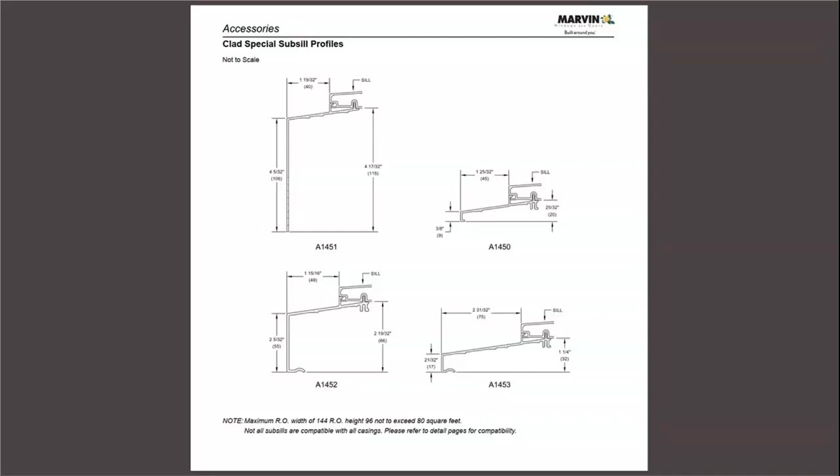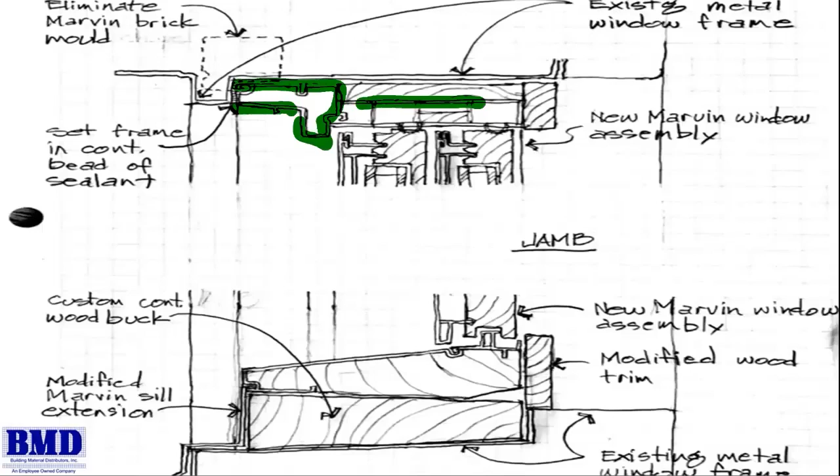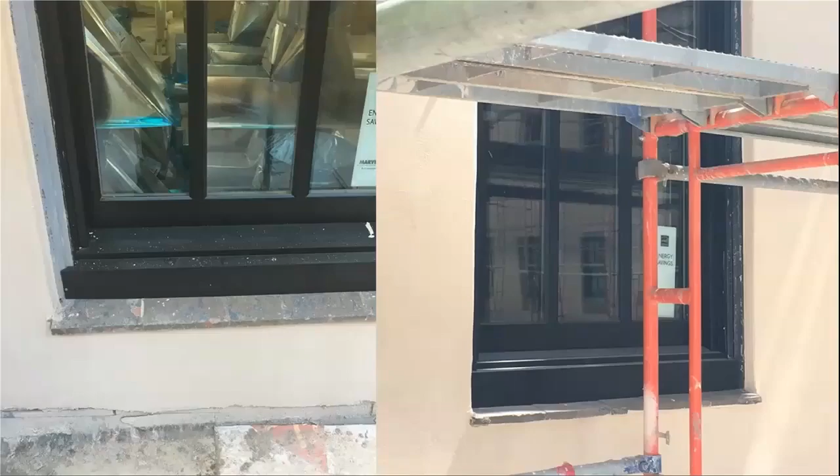And then just continuing with the process, here's that subsill, but in ebony. Do you remember when I showed you that detail when we slid over that subsill, trying to find what would work, and I showed you how it was a funky detail? I'll put an arrow here. So it was really tricky, in my opinion.

The installer did a great job. He took the profile of the original steel casing that you see there and created a jig. He cut the ends of the subsill profile and notched them on both sides so that when it was put in place, it fit as if it was meant to be there from the beginning. So what you see over here on the right, again, this is still mid-construction, but it's essentially the finished product, obviously still needs to be cleaned up with some construction overspray.

You can see how everything tied in and fit perfectly. You can't really see it here, but there's intermittent caulking, there's a gap. So in the event there ever was water infiltration, water would find its way down, take the least path of resistance, and weep out on the original terracotta. So you have a plan for water management long term.

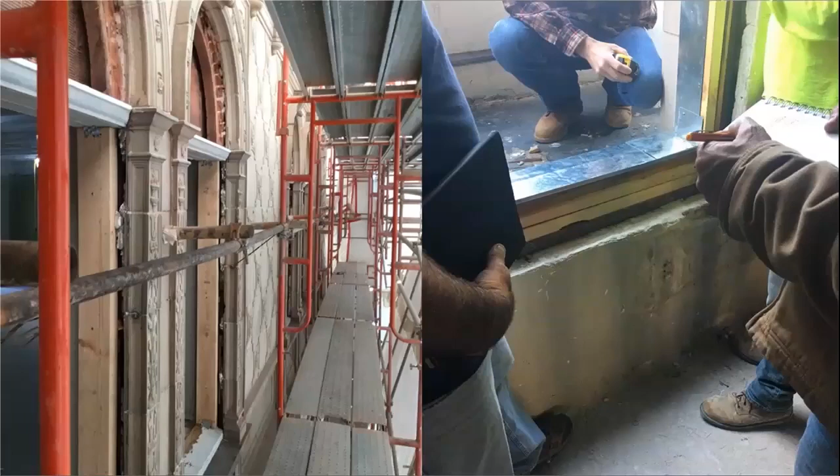So here's us on that top floor that I circled out on the scaffolding. You can see here are those round tops, and here were the original double hung windows. So when removed, you have these big, deep cavities in here. So what we propose is to put a buck system, a wood buck system, in there.

But what we also found is when we removed those arch tops, there's this faux wall behind there. So if you're standing on the inside, and we'll draw Mike Anderson there. There we go. If Mike Anderson was on the inside looking out, you can't see. So how do we contend with all this? And then how do we deal with these cavities when we put in the buck?

And then how do we tie it into the original stonework? And how do we make it waterproof? And how do we make sure we don't screw it up?

So what we see on the right here is us just in that process, coming up with the plan. I don't want anybody to look at this rigid pan and say, wow, that's a horrible rigid pan. Yes, it is, but that's not what we'd advocate during actual install. This was purely for mock-up purposes—us coming up with the idea of putting a rigid pan in there for long-term water management. We always say a rigid pan is cheap insurance, as it does a great job managing water.

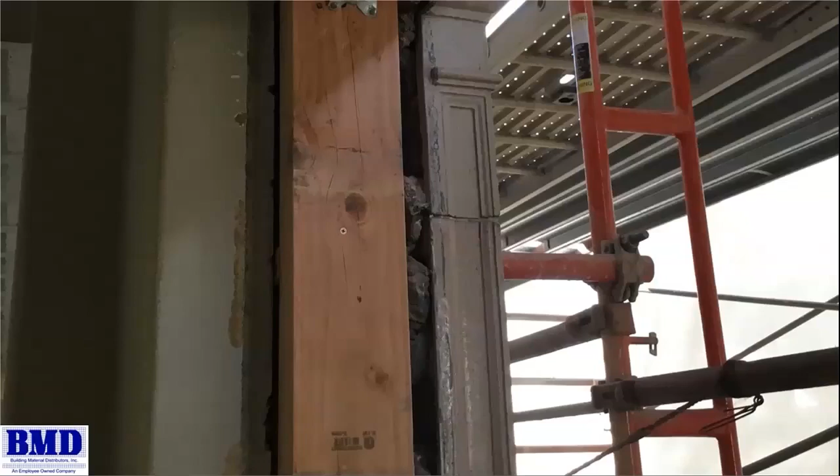Let's go a little further. Here's a close-up. We got our buck system in here that filled in this deep cavity behind here. But again, how do we contend with all this?

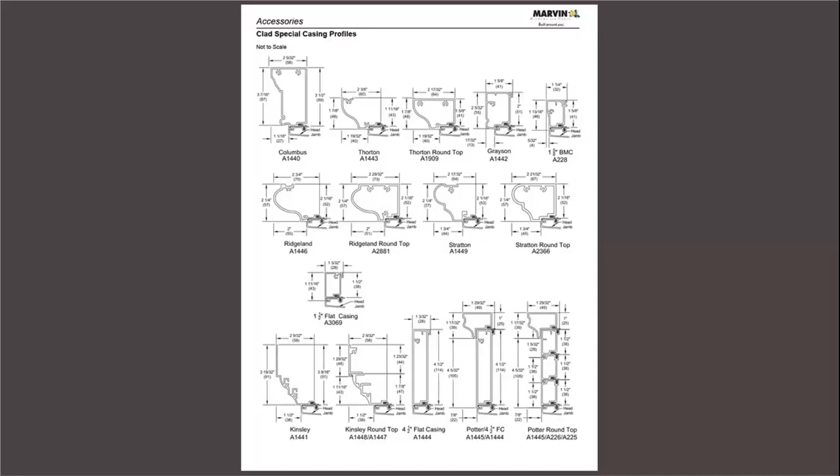Luckily, Marvin has a wide variety of extruded aluminum casing profiles. This isn't all of them, just some of them. But what we ended up selecting, I believe, was the Grayson casing because it closely resembled the original wood casing on this building. And this is what the San Diego Historic Board approved.

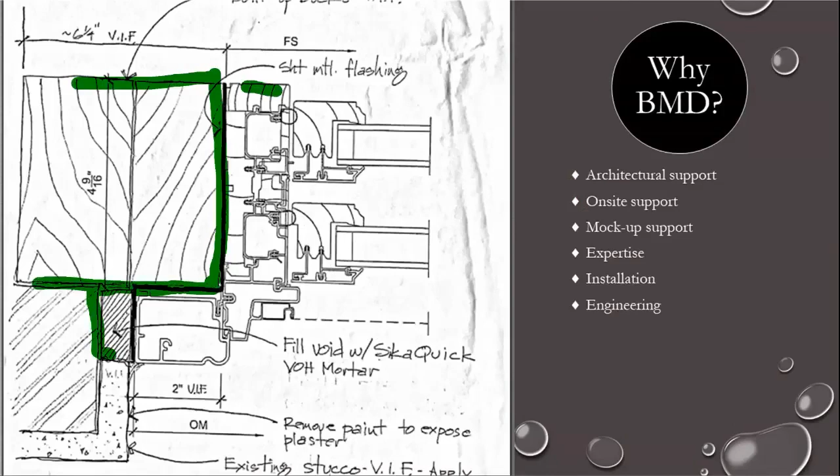Here's the wood buck, and here's the window. But then there was this void, so we proposed to fill it with SikaQuick mortar. And you can see how our casing here, which comes applied to the window, ties all together. So let's look at that in real life.

So quite a lot of collaboration, technical support, and consulting to bring all this together, and this is what they were looking for. Other manufacturers were brought to the table, but it was BMD as the Marvin manufacturer rep collaborating with our great dealer network and our tech department to really drive the solution on this project.

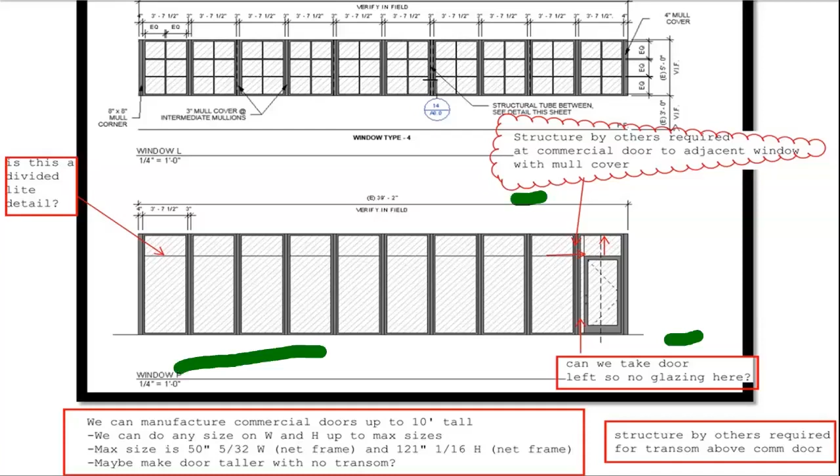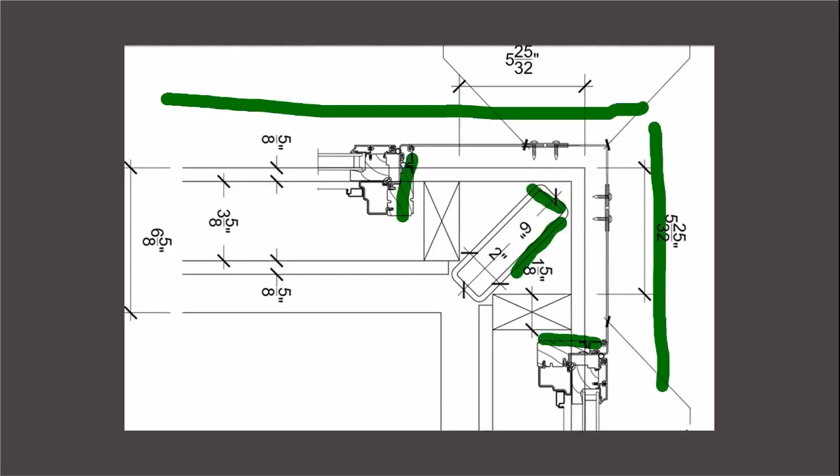So all these red lines represent the collaboration of us going back and forth with the architect to come up with the design. Here's a snapshot of one shop drawing we created for very large Marvin narrow frame awning windows, large mull assemblies, connected in a 90-degree fashion. This drawing shows where the steel structure was going to be, here's our windows, and this represents all the aluminum extrusions Marvin has and how we tied that together. Just one snapshot of the collaboration that supported this project.

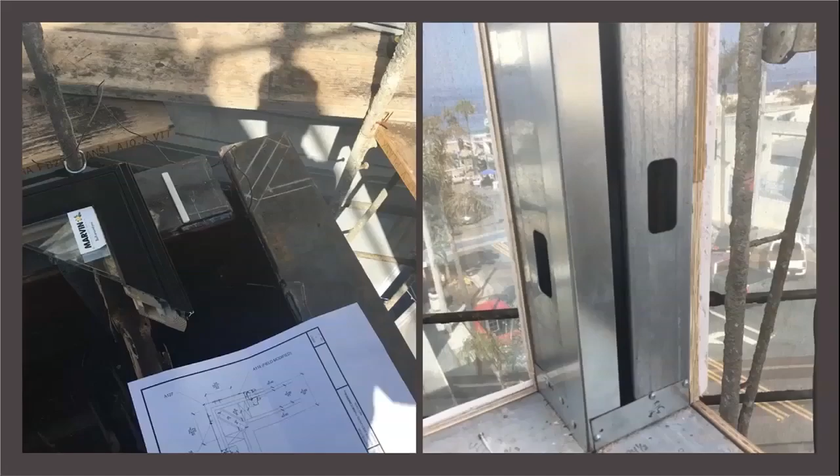Here's that shop drawing I printed out in my printer, on the left. This is actually the third floor, all the walls are removed, this is the outside scaffolding. We were literally walking on top of where the third floor used to exist. You can see there's chalk, and here you see a corner sample window. We sat out there with the fabricator and the installer and had everything chalked out and measured because we didn't want anything to go wrong. On the right you see that fabrication that was done for us.

Let's continue down. So this is what it looks like now. These are all narrow frame awning windows, they came factory mulled about 2 wide, so about every 2 wide there was some structure required by others, and we used the Marvin standard aluminum mull covers to cover those, so we had a consistent look all the way across. You can see how we did that nice 90-degree extrusion profile to tie it all together, so it looks as if it came off the truck as one large assembly, but obviously it was pieces put together.

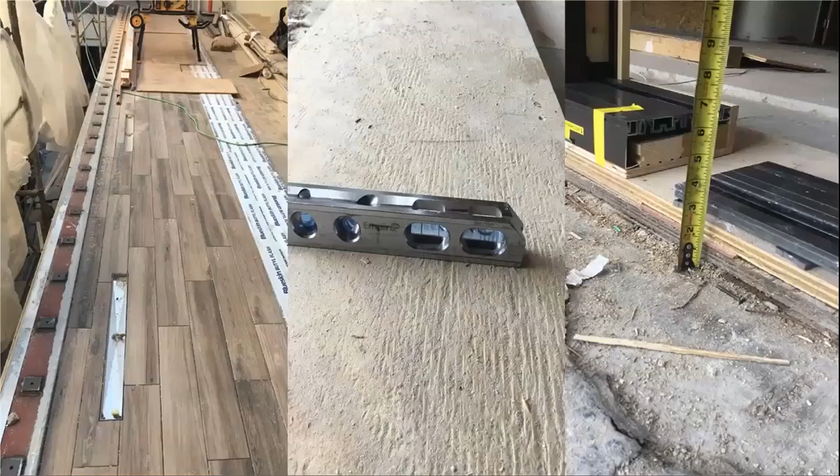There was no multi-slide in place there - there were just basically glass doors and regular glazing, a little bit of an antiquated look, to put it lightly. So big transformation. This again comes back to collaboration, making sure that we're forward thinking.

What is this going to look like? How do we want this to perform? This is on the ocean, this is on the coast, we're thinking wind-driven rain, there's no overhang. So on the left here this represents us showing the different thresholds that come with the door system.

There's a water management system, and there's an ADA system that has no water management, which is what they ultimately went with. So what we had to ensure to counter that was whether we had slope so any water infiltration would keep going to the exterior of the building. We had to ensure they put in a nice drainage system, and what was nice is we did get some heavy-duty storms right after - it does rain in Southern California on occasion, and we got some nice heavy-duty storms on the coast and it performed beautifully, no issues.

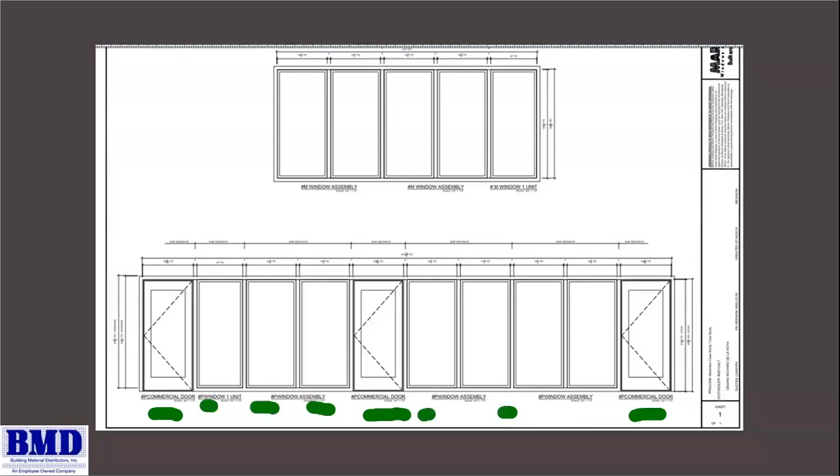And then what you see are Marvin narrow frame direct glaze windows. These would come factory mulled, I want to say every 2 feet. And what we would do is, here we had a solid mull. Marvin has a wide variety of mull options, so we did a Marvin solid mull, and then there would be structure by others here, and we would put a mull cap over it so we'd get the consistent look all the way across.

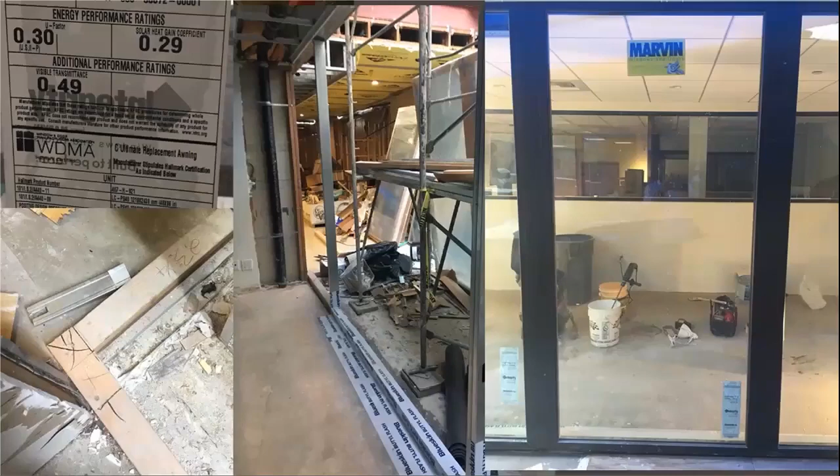So let's take a peek at that. So here it is, just mid-construction. Again, we're all about waterproofing. We're on site just making sure that SAF's being put on there, everything's being installed correctly.

Here's just kind of showing you what I was highlighting earlier in the vertical. So you have like a solid mull here, and then you have a mull covering structure on the other side. And then I really want to highlight this as well.

So here's the energy performance of these windows. It's not just the glass, it's the whole window system, including the frame. So you have a 0.30 U factor and a 0.29 solar heat gain coefficient. You would not be able to get that with just standard traditional storefront. So the energy efficiency of this building was drastically improved, and then of course you're getting just a nice upscale look compared to just the status quo storefront.

And just continuing, this is just what it looks like. You can see our commercial doors, you can see how we mimic storefront, and it continued over here. And we even had to wrap it around some 90-degree corners, and we did wrap those with clad like you saw earlier, just showing you what it looks like.